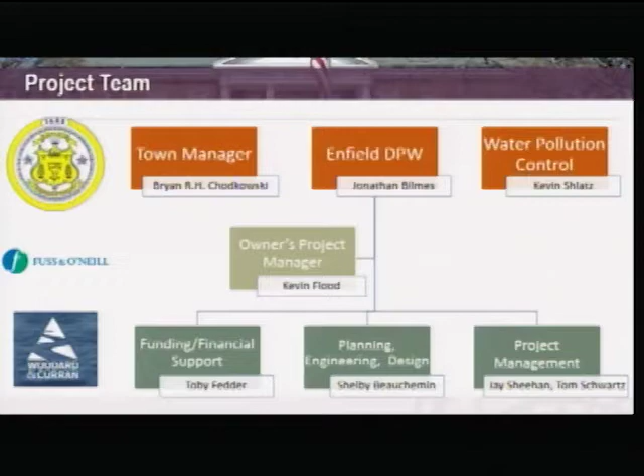So we're going to start with an overview. Most of the equipment here is older than 40 years, and as you know, that means it needs to be replaced. The last major equipment replacement here was in 2004, shown in the middle of the screen, an environmental upgrade for nitrogen. Tonight we're going to focus on recent events, recent being 2013 and more recent than that. We'll also discuss why the last bullet on this timeline shows pump station design just starting in 2018.

An important thing to remember as we talk about this project, where we are and where we're going, is that it discharges to the Connecticut River. All the wastewater treated in Enfield at the plant goes to the Connecticut River. So this is a major environmental project, not only for Enfield, but for the entire state—impacts on environment and public health. We need to keep that in mind as we talk about dollars and cents and rates and things like that too. There's a higher purpose here.

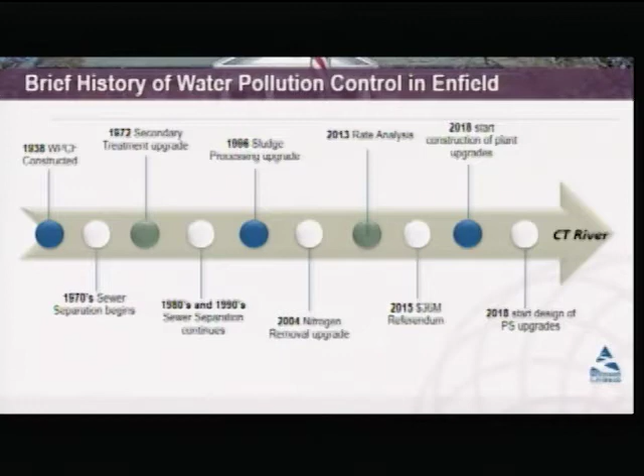So let's start with 2013, as I said, we're going to start in the more recent past. The first thing we did was, as it says here, a capital plan and rate study.

We needed to do this process to be eligible for Clean Water Fund grant money. Prior to 2013, the wastewater treatment plant costs were in the tax base, so we needed to separate those out and go to a standalone enterprise fund or revenue fund, which was done, as adopted in 2013.

I think it went into effect January 1st, 2014. The purpose here was to provide a steady stream of funds for the water pollution control infrastructure and put it on a firm financial footing.

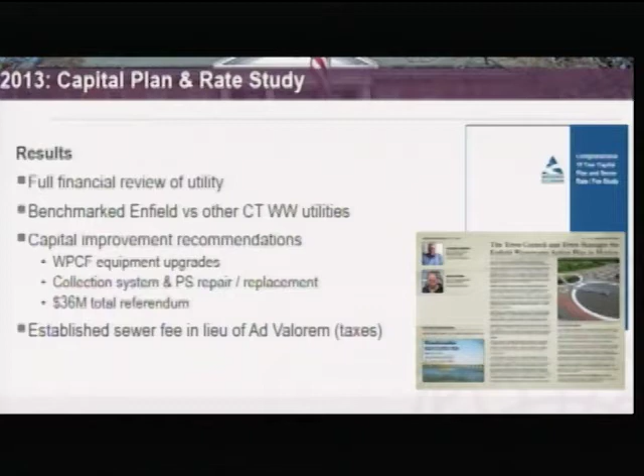Prior to this time, the water pollution control plant would borrow from the general fund and is paying that money back over time, but was always competing for capital projects with everything else in town. That's why, for example, there had been no significant improvements since 2004. That obviously couldn't continue, was not a good thing. And as I said, needed to be done to qualify for Clean Water Fund grants.

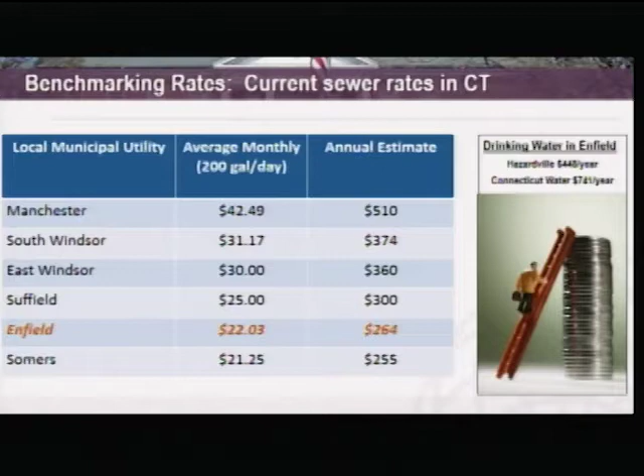The next major thing that had to be done was a facilities plan. This was a top to bottom look at the whole system, not just the plant, but also pump stations and piping. There were smoke tests done to see who had illegal connections. There were meetings looking at consistency with the town's plan of conservation and development, all this big picture look at it. And this was funded 55% by the state of Connecticut.

And again, this was a DEP requirement. We couldn't keep moving until we did this. They needed to see this facilities plan and see how this project fit in the big picture in town.

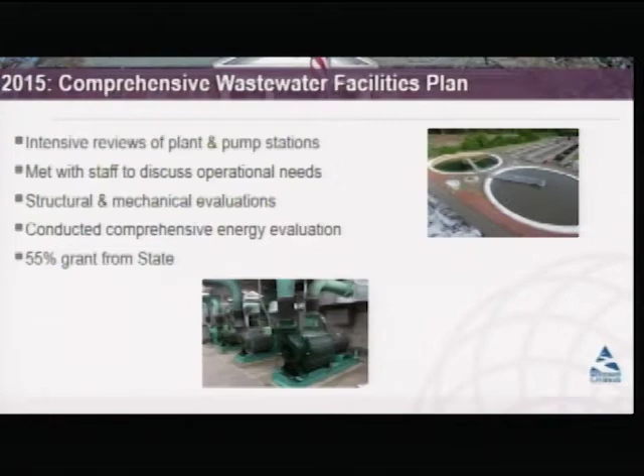One of the things that has been a constant in this project is public outreach and information, and I think that's one of the reasons why the referendum passed by a good margin. There's always been public outreach and public input since we started back in 2013, and we tried to be as transparent as possible.

There's a dedicated website specially designed for this part of the project, and you can get to it through the Town of Enfield Water Pollution Control page. It's got tons of information, our minutes, our project team minutes, agendas, important documents, and lists of all the work required. It's very easy to use, an intuitive, visual type of website where I think you can find things quite easily. We worked with Woodard and Curran on developing that, and I think it's a good tool.

Let's just spend a minute on the collection system. During the facilities planning, in 2015, we identified a lot of work that needed to be done at the pump stations. We can do all we want at the plant, but we've got to get the wastewater to the plant. That involves pipes, manholes, and pump stations.

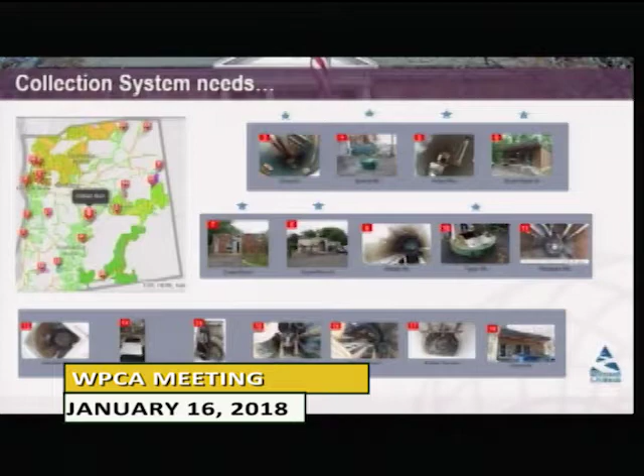There are 16 pump stations in town. Many of those are very old and need work. We know that. We had hoped that as part of this initial source of funding, that is the $36 million, we'd have been able to do more with the pump stations. But other more pressing needs at the plant and with some of the piping have reduced the amount of money we have right now available for pump station work.

We still have money included for designing what we call the high priority pump stations, marked with asterisks. We've identified 7 pump stations that we need to tackle first.

We've also started to set aside money, recognizing that the referendum's $36 million probably wasn't adequate. We've started setting aside funds in our annual capital budget, and we did that this year: $550,000, with the idea being that every year we'd set aside $550,000 in the annual capital budget, with a preliminary schedule to fund all the pump station upgrades over time.

The idea is a consistent financial model, putting aside dollars every year and planning for the outcome. One benefit of staging the pump station work, rather than doing it all at once, is that they don't all need to be redone the same year - they'd be sequenced in, consistent with the long-term capital improvement approach we've discussed.

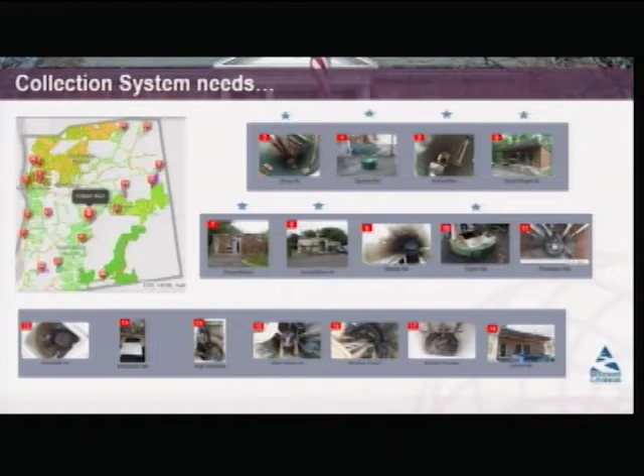It added costs and has delayed us somewhat. Basically, we need to protect from the 100-year flood - Beeman's Brook runs behind the dog pound. After many discussions with DEP, we've agreed we need to build up this berm a bit in that area of the water pollution control plant. It's added some costs, engineering and design costs, and delays.

The other thing it's done is we've had to engage Amtrak, because that berm is on their property. So now we're talking about dealing with the railroad, getting easements and so on, which as you can imagine isn't easy. These are a couple of things that came up.

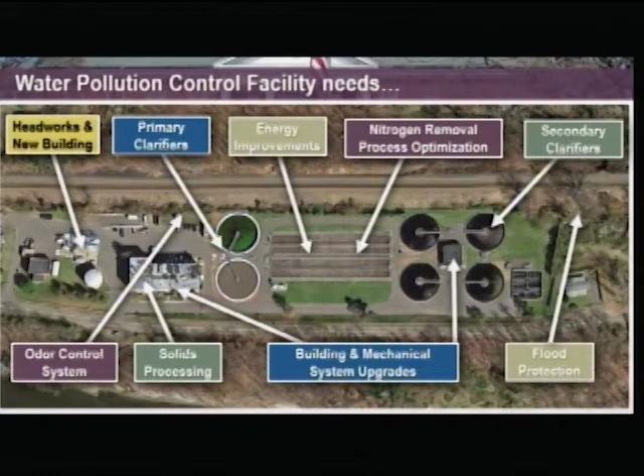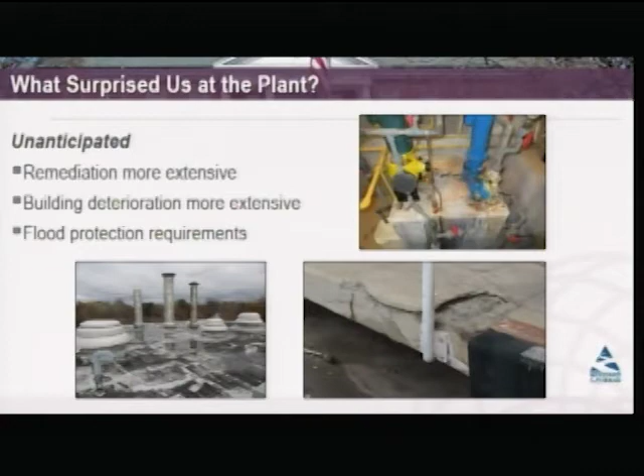But again, the plant is the major recipient of the referendum money. What are a few other things that surprised us and the designers as they got into it? Remediation was more extensive than originally thought, there was some building deterioration, and again the flood protection requirements - these drove up some of the costs needed at the plant. Woodard and Curran can address any of these in detail during Q&A.

Regarding pending approvals, Connecticut DEP has been involved since day one. They've attended our meetings, we've met with them in Hartford, and they've come to Enfield many times. This is a major environmental project under their jurisdiction, and they're also controlling the grant funding, so they need to be kept apprised and approve basically every step of the way - and they have. We have a folder of different approval letters from throughout the project.

We've worked very hard to make this process as cost efficient as practical, and there were two value engineering processes during this, mandated by the Connecticut Department of Environmental Protection. They brought in another firm to review everything we'd done and give us cost-cutting solutions. In a few cases they said what you've planned isn't enough and you need to add, but mostly they were looking at cost-cutting. We've gone through a couple of those processes, trying to get the most bang for the buck, understanding this is a once-in-a-generation opportunity.

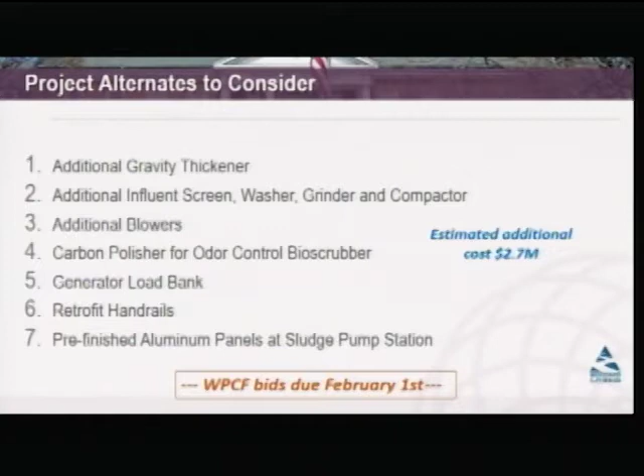And if not, do we fund them over time, and what period of time? So now let's move on to some of the financing questions.

Doing some simple math, in 2013 we identified about a $36 million project. We assumed we were going to get a contribution from the state prison system. There's a contract between Enfield and the state prison system, and we estimate that payment would be about $3.5 million. We did notify the state in November that this project was moving forward and that we look forward to meeting them and discussing their contribution. We have not heard back, not surprisingly, but that is part of our financial picture. There's a contract. We also assumed in 2013 that we would get almost $5 million in grant funds, and that the rest would be, on the plant side, a low-interest loan at 2%. So that left $27.7 million to pick up on sewer rates.